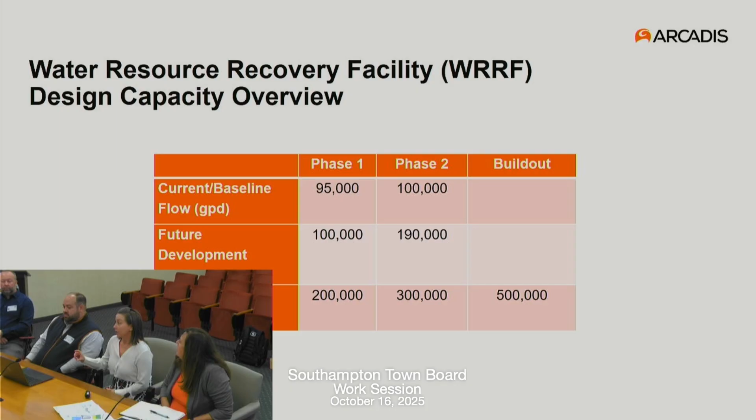And we added on top of that for phase one an allocation for that future development that is being worked through with Historical Concepts that Janice mentioned. So we have about double the current usage as an allocation for future development, bringing the phase one capacity to 200,000 gallons per day. And then in phase two, similarly, the identification of current usage based on water use, an addition for future allocation for development, and then a total. So this is just to give you some context on what we're looking at for the capacity of the facility.

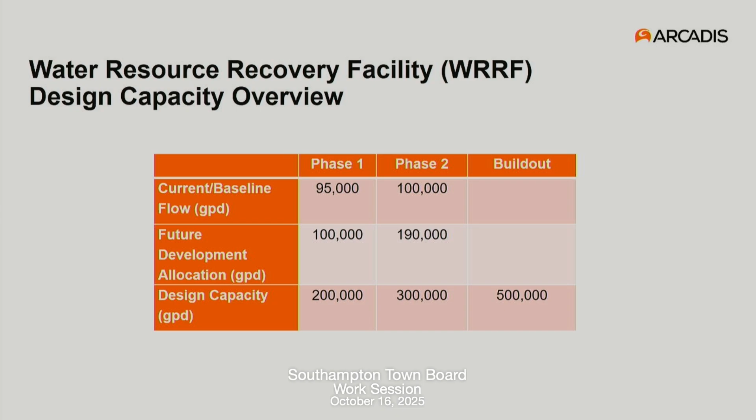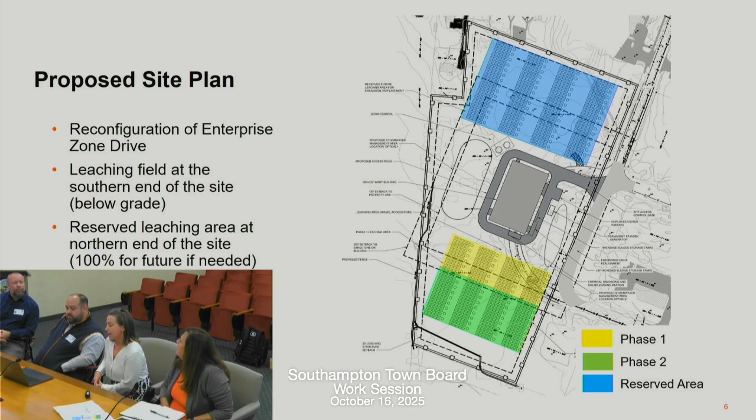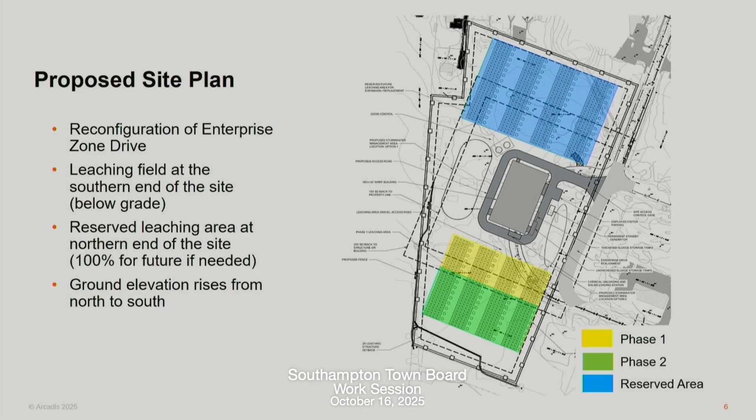So the blue area at the north side is a reserved area in accordance with standards. We have to have 100% reserved area if it's ever needed in the future. Is that a county requirement? It is, yep. And then the yellow is the leaching area that's associated with the phase 1 flow, that 200,000 gallons per day that we just went through. The green is phase 2, so that 300,000 when we get to that point. And again, all of this is below grade.

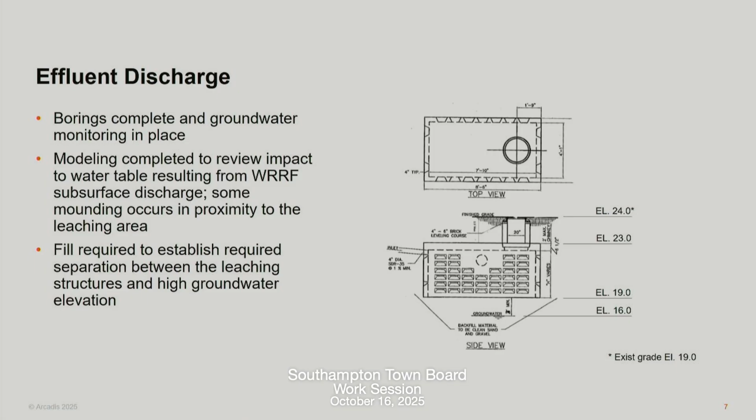Will it require any kind of fencing then if you're raising the grade? We'll have to look at that. We may need some retaining walls or something just to make sure that we don't have anything steep in terms of drop off, but that'll all be advanced through detailed design. And there's gonna be a site fence around the entire property, for security reasons. That's a good point.

So another thing that I should have highlighted on that first slide, we have areas identified on the site for stormwater management. And our goal here is really to make them another educational component of this project. Our site's very close to the Phillips Avenue Elementary School, so we're very cognizant of that. We'll talk more about that in the outreach that we've done. But we really want to use this facility as a tool to inspire future generations about the importance of water quality, especially in this area. So the stormwater management is another mechanism that we feel we can do that through.

So a lot of people think of bioretention as just a big divot that's grass and kind of an eyesore. We're planning on being very intentional with landscape design and specific native plants and really making it something that's beautiful and not something that's just a big hole on the site for stormwater management. That's good.

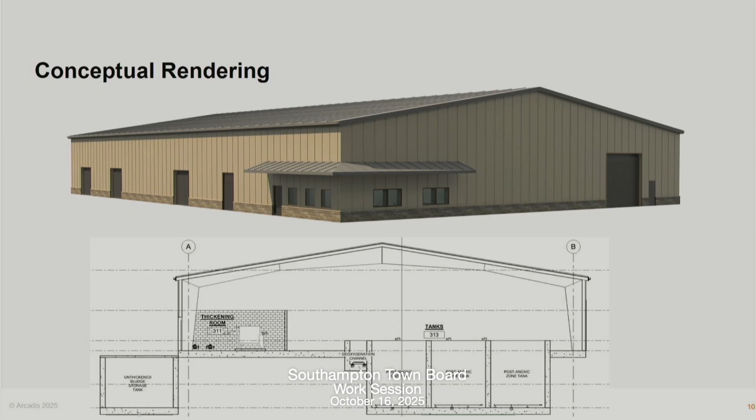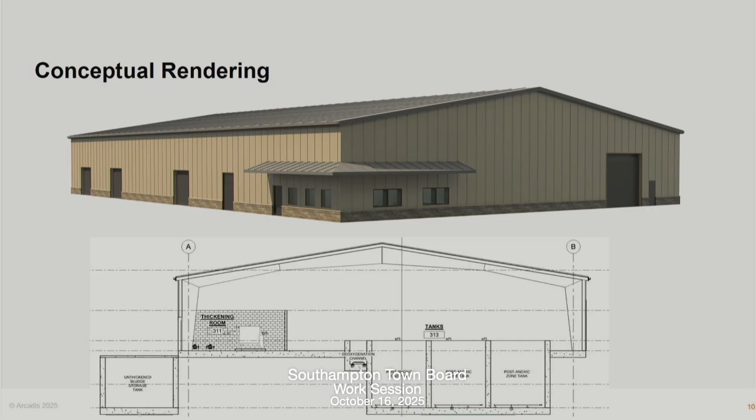Yes. Okay. It's a little plain, but yeah, we want the first one, a little more architectural details. And when he showed it to me, I said, the color. So all of this is flexible. Yeah, I don't know if you want it to be brown. No. There'll be plenty of brown, but it doesn't need to be outside the building.

But everything that is open on the tanks is gonna all be contained inside the building. That's right. Anything that's outside is covered. We have some sludge storage and holding tanks that are outside of the footprint of the building. You can see that on the bottom left of that cutaway. That's below grade with the cover on top, so nothing that's going to be exposed or seen from the road, or smells. Okay, thank you. And everything is odor controlled as well, which we'll get into.

And that's gonna all be on grade that we have now? You don't have to raise it at all, it's gonna be as is? We're gonna need to figure out the entire site grading, because as I mentioned, we do need to bring in some fill for the leaching galleys. Right, but the building itself? The building itself, most likely, is not going to be elevated. No, it'll be on grade.

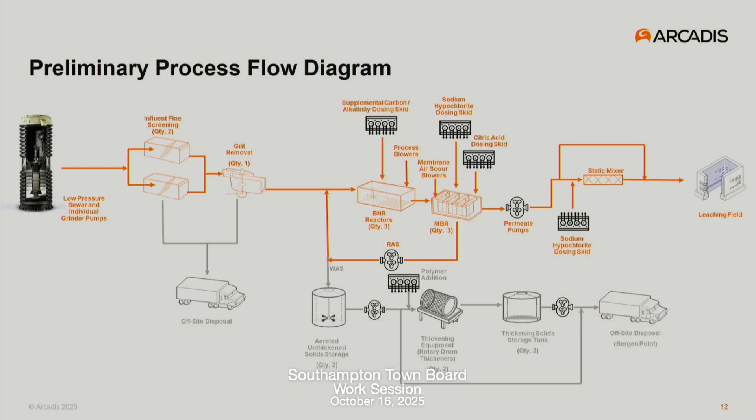From there, we're making provisions to allow for chlorination in the case there's a plant upset or something. We may not need to do it all the time, but we want to make provisions for this, and that can help with odor control and biofouling that may occur in leaching. So we want to make these provisions. You may not need it, but better to have them up front than having an issue later on. And then it will be sent to the leaching galleys.

Are there any polishing filters, like a last stage, or you don't feel it's necessary with this kind of technology? With the membrane bioreactors, you do not need that polishing filter. If we went with the SBR that was originally proposed in the previous engineering report by Nelson and Pope, then a polishing filter would have been required.

Solids, so that's the liquid side of things. So solids would come off of the MBR system, and in phase 1, they're going to be sent to an aerated sludge holding tank and be trucked directly to Bergen Point. In phase 2, thickeners are going to be added to the project because at that point, the cost benefit analysis shows that once you get around 200,000 to 300,000 gallons per day, it is cheaper to truck thickened sludge than unthickened sludge. So it reduces the volume, basically. Yeah, so less trucks traveling to Bergen Point, and it was overall cheaper to do that.

I was glad that the county was willing to work with us on that and accept the sludge at their facility. Yes. So with the thickening sludge, there will be a thickened sludge storage tank. That's where that will be pumped out in phase 2 to the trucks hauling it to Bergen Point.

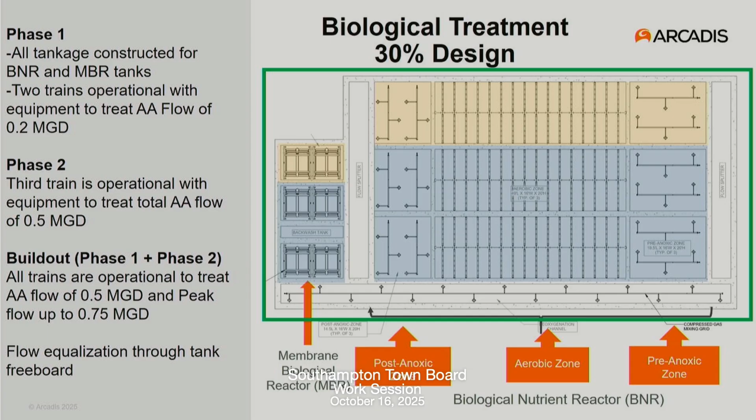So this is a summary of the major equipment that's going to be comprised in this WRRF. So in the process area, there's going to be three blowers, two duty and one standby for phase one, and then in phase two, an additional blower will be added. As I mentioned, the diffuser grids for aeration, one for each of the tanks. Two of them are going to be installed in phase one and one in phase two.

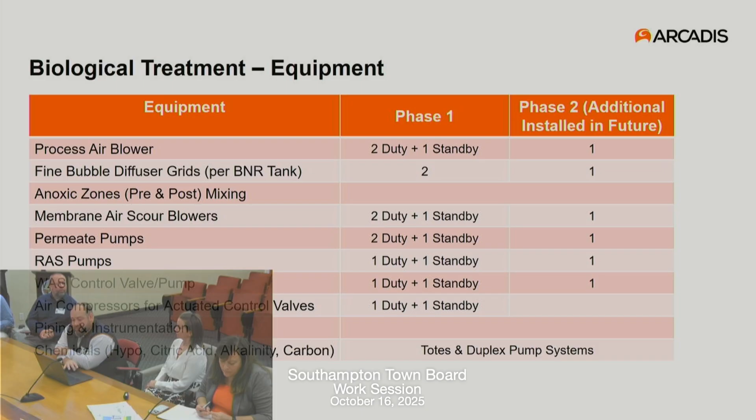Anoxic mixing and sludge mixing. We're using a coarse air, big bubble air mixing. Then membrane air scour blowers, permeate pumps, return activated sludge pumps, waste activated sludge pumps, air compressors to control valves as needed, piping, instrumentation, and chemicals.

We're anticipating sodium hypochlorite, which is for cleaning and disinfection, citric acid for cleaning. Alkalinity may need to be added for treatment and removal of nitrogen and carbon as well.

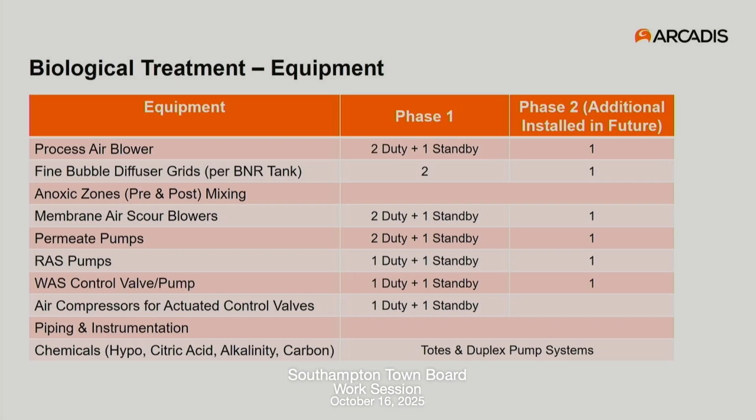So this picture kind of gives you an idea of some of the equipment. So the upper image, that is going to be what's installed in the headworks. It's two screens and a grit unit. It's all packaged on a skid, it's almost plug and play. You bring it into the room and attach pipes to it and odor control, and it's ready to go.

I actually have a question about the building. Are you putting solar on the building to offset some of the electrical costs? We are looking at that. The building is not quite oriented in the correct direction, but we're going to look at the cost benefit of doing that.

For mixing, the lower right depicts what the compressed air mixing system looks like. It's the air compressors and an air holding tank that is controlled by solenoid valves, and it pushes air in and creates this bubble that mixes the tanks. The middle picture is the rotating drum thickener for solids thickening.

And then the bottom left are the odor control vessels, that's really the only component that's going to be outside the building, behind the building, for removing odor. You're talking about the carbon vessels will be outside the building? Yep.

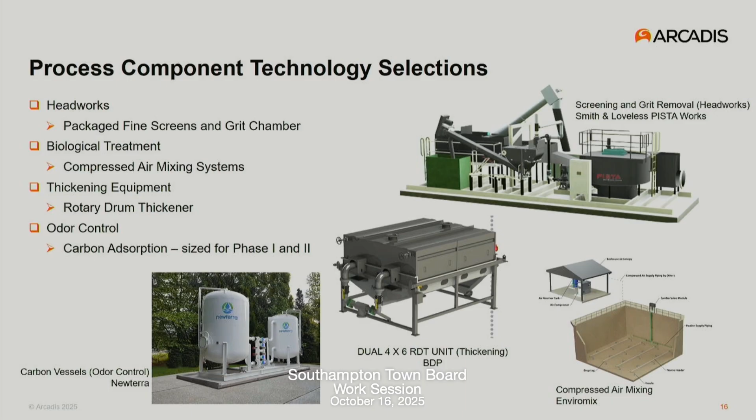Okay, moving on to the collection system. I know you have a printout of the current map plan report figure showing the Riverside Sewer District. We have a figure of that on the screen as well. Our figure on the screen is a little bit different than what you have in front of you, but the green represents the parcels that make up phase one that have existing buildings on them right now. The blue line is the sewer district boundary as it is right now.

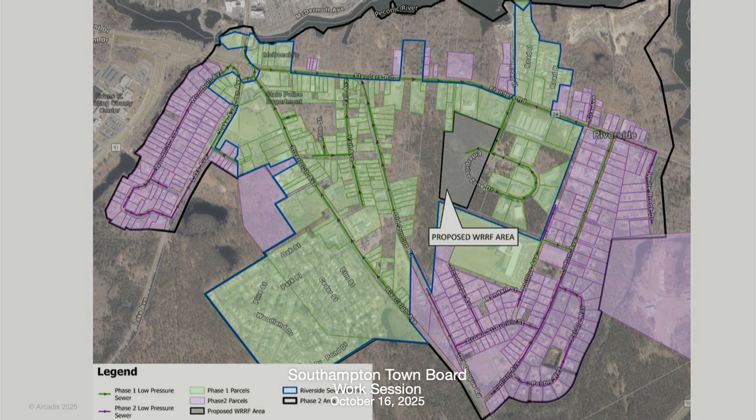We should note that the Phillips Avenue School, while not in the sewer district as part of phase one right now, we have made provisions to include them as part of phase one flow. So they may be an outside user for phase one. Out of district connection? They're gonna contract in, which we have all those municipal agreements in place.

The black line represents the future sewer district when full build-out is completed, and the purple parcels are those existing parcels that would be making up that sewer district in the future. The non-colored ones right now are vacant parcels that could be developed in the future. Wait, what are you saying, that the black or the dark gray is proposed? So right in the middle, that's the proposed WRRF, the treatment plant property. The black line on the very outside of the parcels that are shown, that is the future sewer district boundary.

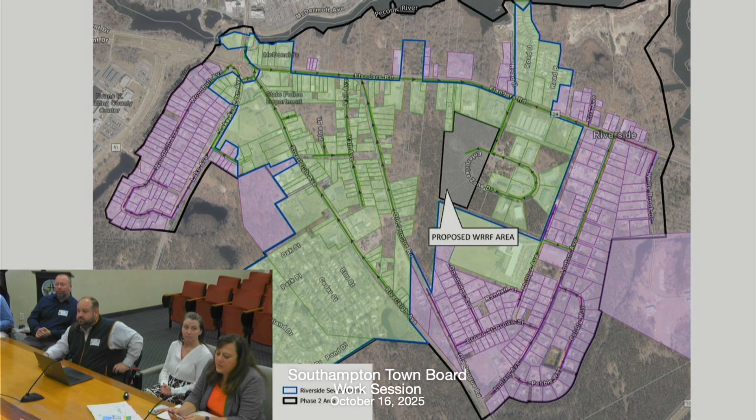Most of those properties are all preserved anyway, so it doesn't really have any bearing on anything, all the top. You mean the green? No, he's talking about this black line, I think, all the way at the top, the whole thing. So it encompasses areas that are preserved. It's the full hamlet of Riverside that the district boundary is going around. I see.

So as how we've gotten here, back in April, May, we had submitted a preliminary engineering report that looked at alternatives for the WRRF itself, the technology used for treating, as well as the sewer. And we looked at traditional gravity sewers with larger pump stations. We looked at low-pressure sewers, and we looked at vacuum sewers. Based on a cost-benefit analysis, we had recommended the low-pressure sewer with individual grinder pumps at each property.

That provided the lowest overall life cycle cost and provided an ease of construction that traditional gravity sewers cannot provide. We have high groundwater in this area. So some of these sewers, traditional gravity sewers, would have to be constructed 10+ feet deep in groundwater. And over time, that would result in the groundwater getting into the sewer.

So you're going to be treating groundwater and reducing the amount of flow that could be treated from parcels, instead of the low pressure sewer that's actually constructed closer to the ground surface, typically 5 feet and above. We're proposing about 4 feet deep. And it's just much easier to construct than gravity sewers. And its operability, it's very easy as well.

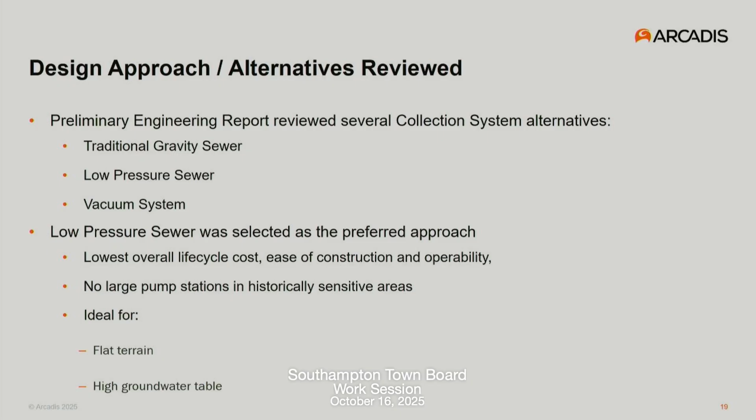Yeah. So low pressure sewer systems, great for flat terrain, high groundwater table, undulating terrain. It just makes things much easier. And we have site specifics who are a rep for E/One in this area here, and they're going to give a little bit of overview on E/One and their experience here in Suffolk County.

Okay. So yeah, any questions at any point, feel free to jump in. I'm gonna try to stay 30,000 foot view of this, but we can get pretty deep into the weeds if anyone wants to go that direction. So just a little quick history on the technology itself, just so everyone understands. This is fairly new to the Long Island market, but it's not new in general.

They've been making these pumps and putting them in the ground since about 1970. It was 4 guys from GE that branched off to develop the E/One product. It's a U.S. manufactured product, actually manufactured here in upstate New York. It's a long history. We have just shy of 1 million pumps in the ground. In fact, next year we're throwing a 1 million pump party, so that'll be fun.

But as you can see in the sheet and on the screen here, just things we've done in Long Island and New York City, which is the territory that me and Zechariah are directly responsible for. When we took over this territory as a company for E/One, we took over in 2016. There had been companies working in this area previously and just not a lot of growth, but there were these needs, as you guys are looking at now, where sewering some of these areas with higher groundwater tables

is very challenging, and putting a large diameter pipe into deep groundwater applications can get very pricey. So this technology kind of gives you the ability to sewer those homes without some of those environmental impacts and cost of deep excavation, shutting down major roadways, and things of that sort. So recently we did about 3,400 units in the Carls River area.

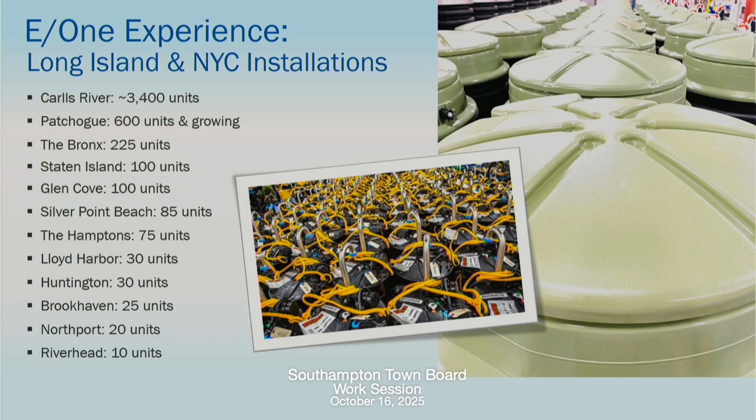A lot of this flow does go down to Bergen Point, but similar to what you guys are talking about here, the Forge River, Shirley, Mastic area had a treatment plant built very similar to what you're talking about here that was designed for the flow for that area. And as a result, you're able to get much more efficiencies, not only from your collection system, but from that treatment plant, because you're not worrying about this I&I where you're getting groundwater in and you're now paying to treat that groundwater. These are county projects, you're saying? Because I thought the county preferred the gravity.

They probably did up until about 5 years ago when these projects started. It was the same idea as they had done some feasibility studies back in 2012 to look at sewering some of these 0 to 2 year groundwater impact areas and looking at the cost-value analysis of gravity versus vacuum and pressure and other things. This was the way they decided they were able to sewer more with the same amount of money, or save money, depending on which way you looked at it.

So yeah, these are Suffolk County DPW projects that we've been doing directly. After we install them, or the contractor installs them, they're actually owned and maintained by the county themselves.

We've done a lot of homes here on the island so far, more than 4,500 to date, and most of those have gone in within the last 2 to 3 years. But we have some in Patchogue that have been there over 20 years. They were, on the island, the first people to really adopt this technology at a larger scale than just a one-off building or something like that.

So the ones you did in Patchogue, is that the housing units or is that part of Main Street? Both. There were some housing units that went down on West Ave back in '99, 2000 area, and then we've done stuff on Main Street down there from then on forward.

We have connected, I was just at one yesterday. We add things to Main Street in Patchogue weekly at this point.

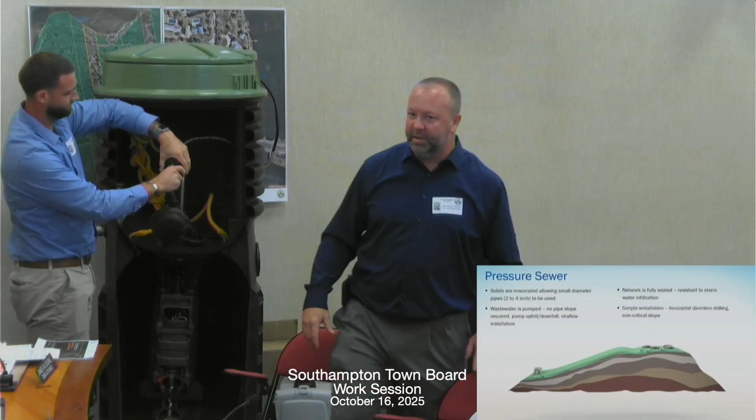So technically, you could take this unit, take the lid off of it, drop it into the ocean, and the pump would still operate.

We can't dewater the bay, but it wouldn't affect the pump to try. Pumps want to run, they would just sit there and run. It just would not be able to really keep up with the flow. But the pump is fully submersible, there's no part of it exposed.

And then the vent pipe is internal? Yeah, so the vent pipe is built in where it actually vents out under the green lid you see at the top. Years ago, E/One's first iteration of this pump was the 200 series, and that existed from probably 85 to 94. They actually had a vent on the side of the tank.

Most people, they see a vent, they smell something. They don't see a vent, they don't smell anything. It's more in your mind than anything else. So raw sewage, you may pass by every day and not even notice it. It's not that bad of an odor. Septic and grease, whole different world.

Zechariah also gets to work with his father on some wastewater treatment plant operations where he gets to really get deep into that stuff. But the venting out under the lid, because we're keeping such a low amount of sewage on hand, I have pictures and slides from different presentations where people set up picnic tables over the top of these lids, and that's where they eat their lunch. No one knows what that green lid is, but it's typically not an odor issue, though we do need a nice fresh air vent.

Depending on the groundwater elevations, if you had an area like in Patchogue, some of those areas down on the South Shore, there's houses down there whose front yards go underwater four times a year. In those cases, we have what's called a lateral vent system, where a pipe comes out sideways, up the side of the house to a little snorkel vent, maybe four feet up or whatever the high point is, because the pump does have to breathe. As water comes in and out, we have to be able to displace that air. So our traditional vent is what you see here, right up through under the lid.

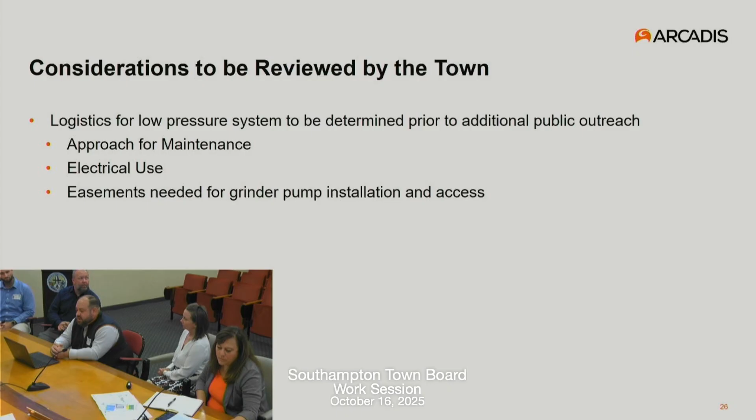So the one thing we really didn't talk about was approach for maintenance. So there's really 3 models. A company like Site Specific could be the owner's agent and take care of all of the maintenance requirements. Their number is the number that gets on the box, and they get the alarms and they go out and take care. It's a little bit more expensive, that option, but it takes all of that out of your worry.

There's a hybrid approach where you may have someone on staff that does some of the more routine maintenance and interfaces with Site Specific over the long term, replacing pumps and stuff like that. Or third, you could have full ownership of maintenance requirements. So at some point, the town is going to have to decide what model the sewer district is going to function on. Not just for maintenance, but replacement costs going forward as well.